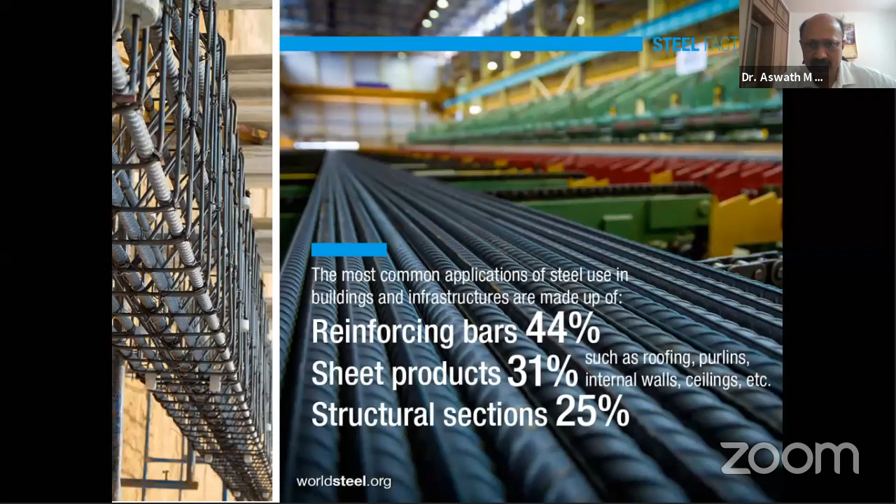We have to bother about the quality of reinforcement steel, about 44%. So why do we talk about quality? As I mentioned earlier, quality is not just necessary for reinforcement steel, but it is also necessary for other products.

Since our industry is not controlled, many products are manufactured without any quality control in place. Anybody who has got some finance can start product manufacturing in our industry, and there are no strict guidelines or eligibility criteria for giving licenses to the product manufacturers.

With this background, as users, as civil engineers, we have to be very careful about quality, and we should identify and select the manufacturer and supplier based on their background and quality consciousness. Once we start recognizing quality conscious manufacturers and suppliers, the industry will automatically transform from unorganized to organized sector, where quality will be one of the most important criteria.

As I mentioned earlier, regarding concrete products, we have been doing a lot of activities and programs, seminars, workshops and other things to sensitize people about the quality of concrete. Now we should talk more and more about reinforcement steel also in the days to come.

We have various issues in the civil engineering industry, whether it is storage of material, fabrication, or various other aspects. It may not be so bad as of now. Some time back, I took these photos from open source.

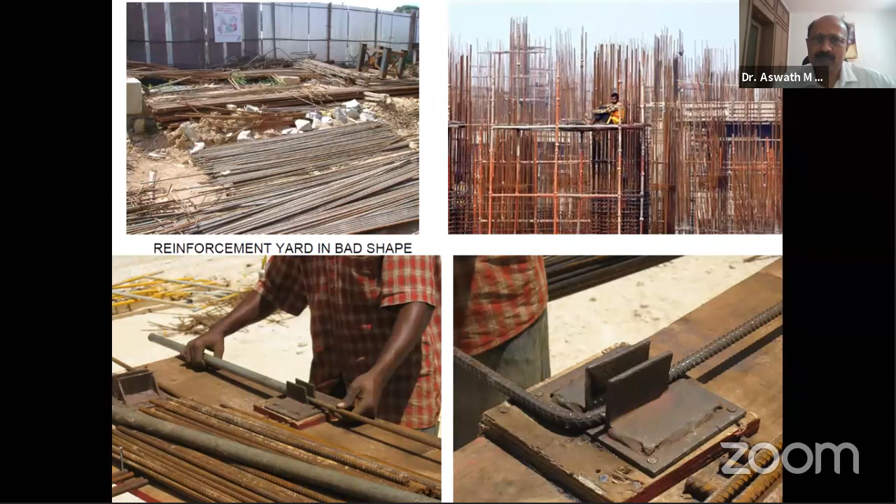You can also see some of these sites in the scenes where corrosion and other aspects are not taken care of, and demolished steel is also reused without processing. That is also another issue.

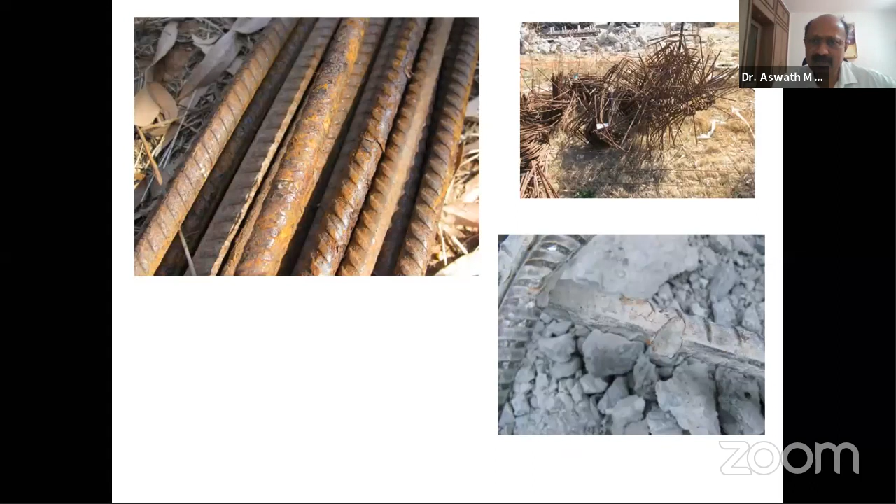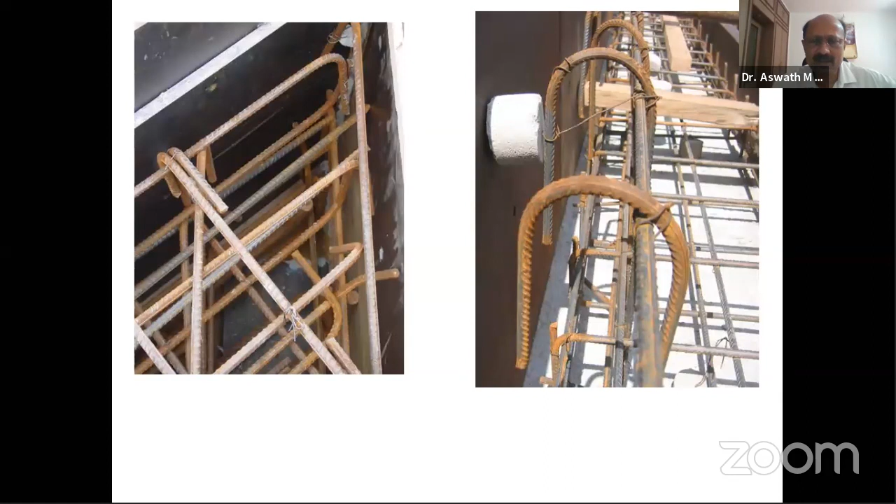Fabrication also has a lot of issues. We should know how to detail the reinforcement - detailing of reinforcement is another major area. All of us involved in analysis, design, and implementation should take care. We can have one more webinar on detailing of reinforcement also.

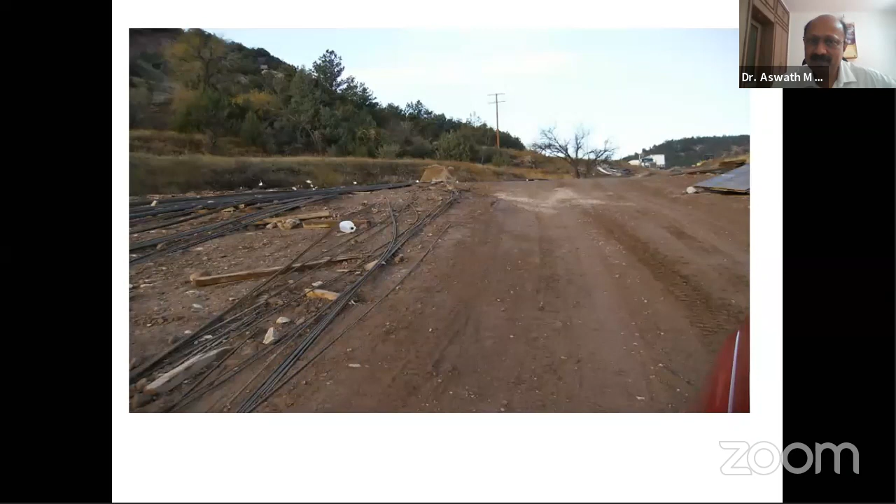Proper concreting methods are also very, very important. When you look at all these issues, we have construction quality as a whole as a major concern.

Even though many high-tech consulting firms are there, and multinationals are into the industry for major projects, maybe construction quality is taken care of there, but in medium and small industry projects, we still find some of these issues.

Definitely we should find solutions to all this, and address it from the manufacturing process - we should see whether proper infrastructure is there to manufacture from a particular manufacturer, and selection of the manufacturer and supplier should be based on the quality systems they have implemented, because that is where basic properties of the material are concerned.

Unless they have proper infrastructure and manufacturing process in place, we will not get a good product. So then understanding the properties and behavior of the material as reinforcement, we need to understand. Once we understand the properties and behavior, we become more sensitive to select a good product.

How to store and use the reinforcement - there are a lot of aspects which make a lot of difference in the overall strength of the building. Testing of reinforcement and quality checks at each level, starting from raw materials to the manufacturer till we use the reinforcement - we need to adopt proper testing methods and quality checks in place.

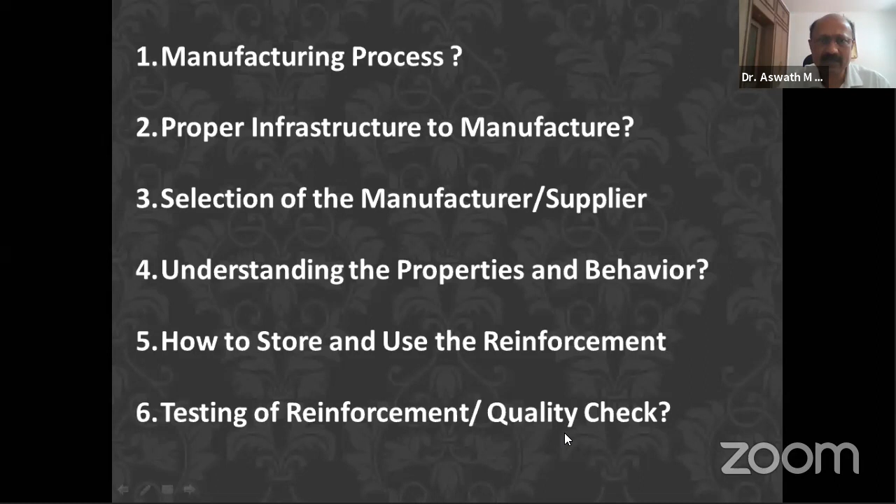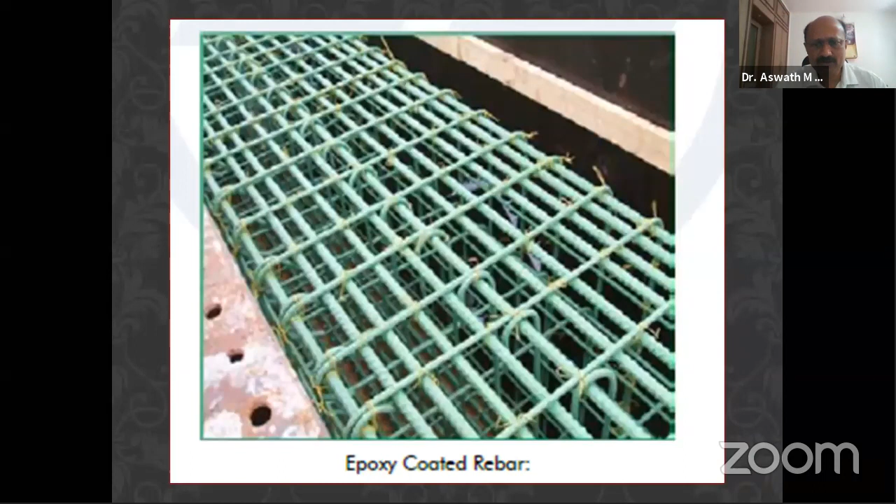We have different types of reinforcement bars - deformed bars, stainless steel bars, epoxy coated reinforcement bars, galvanized rebars, and FRP bars which are very popular these days.

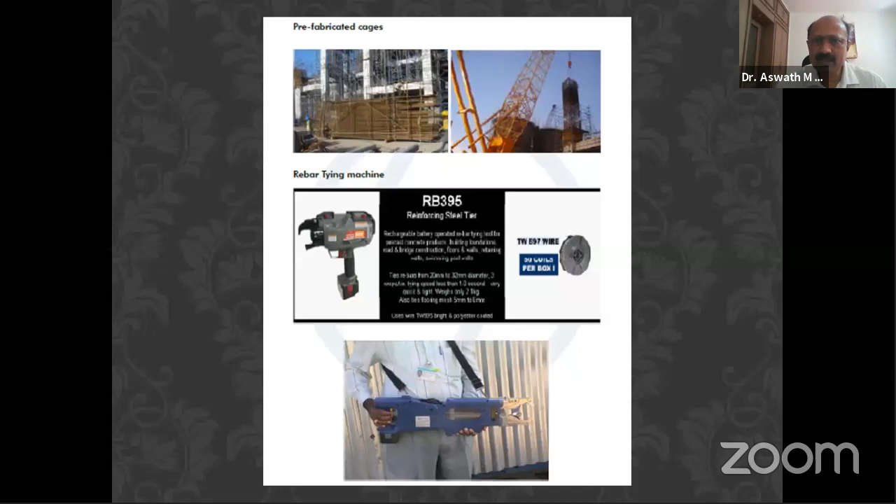A lot is talked about the equipment used for reinforcement fabrication and other things. Rebar tying machines are available - we should use all these latest methods to minimize loss and improve efficiency of use. We are having a lot of couplers in place, and we can save material if we use proper couplers.

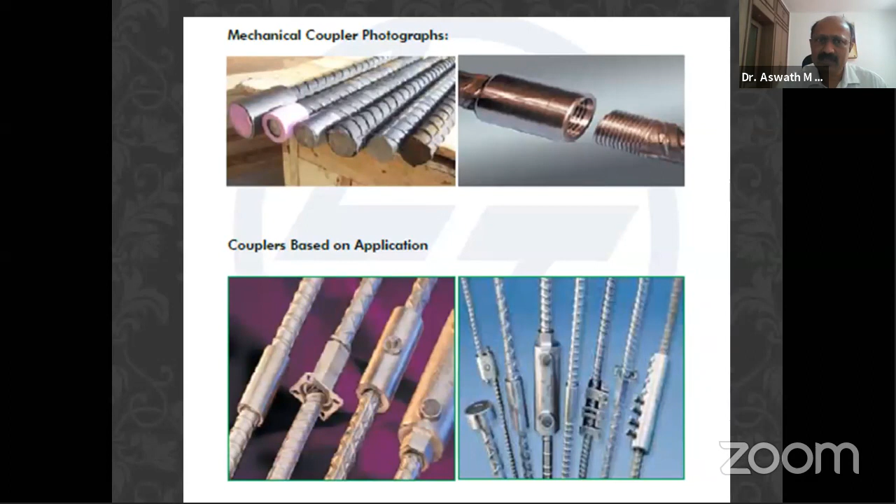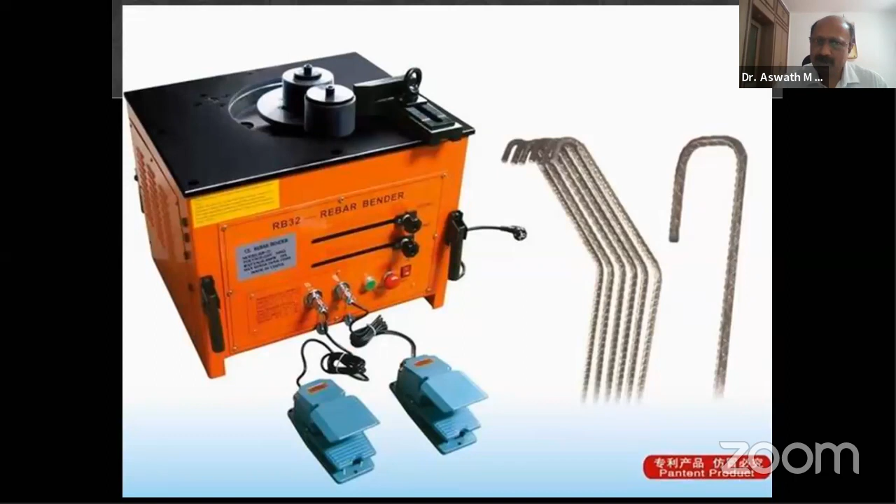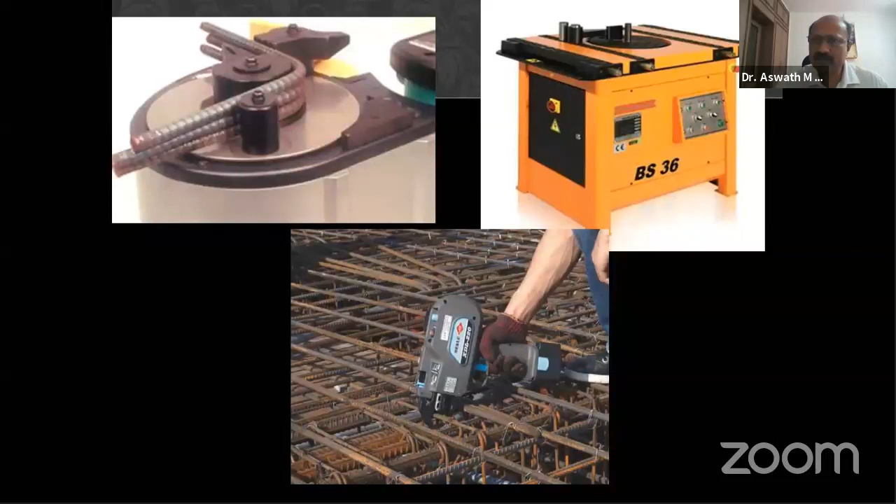We have different tests for the reinforcement. Bar bending machines are available these days, so there are a lot of solutions available to address each of these problems we face in the industry. A lot of solutions are developed by various manufacturers. We should be aware of what is available, and based on the knowledge, select the

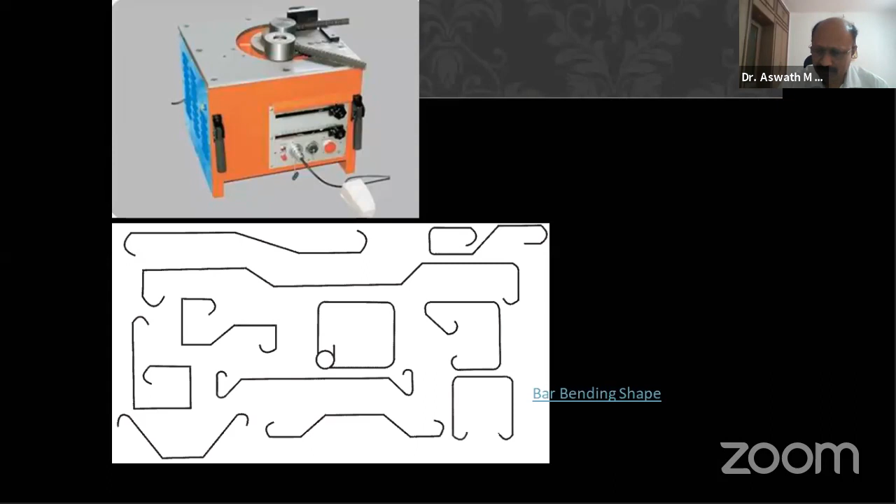best material, best product, best equipment for the reinforcement. Bar bending is a major aspect in reinforcement steel. Many times we use bar benders who are not skilled or properly trained, so we end up with a lot of problems as far as bar bending is concerned.

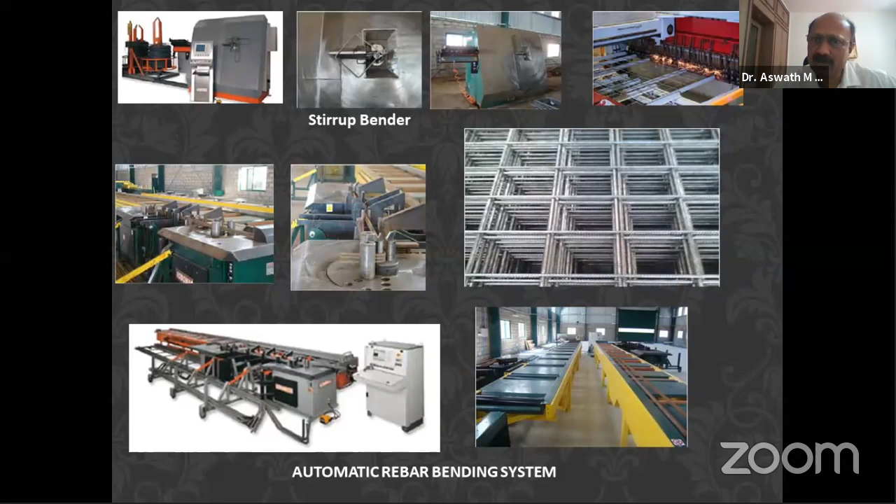The automatic rebar bending systems are also in place for bar bending issues. Now many people are coming into the industry who, if you give them the reinforcement drawing, the execution drawing, will supply the ready-made steel. You can just bring it, place it, and then start

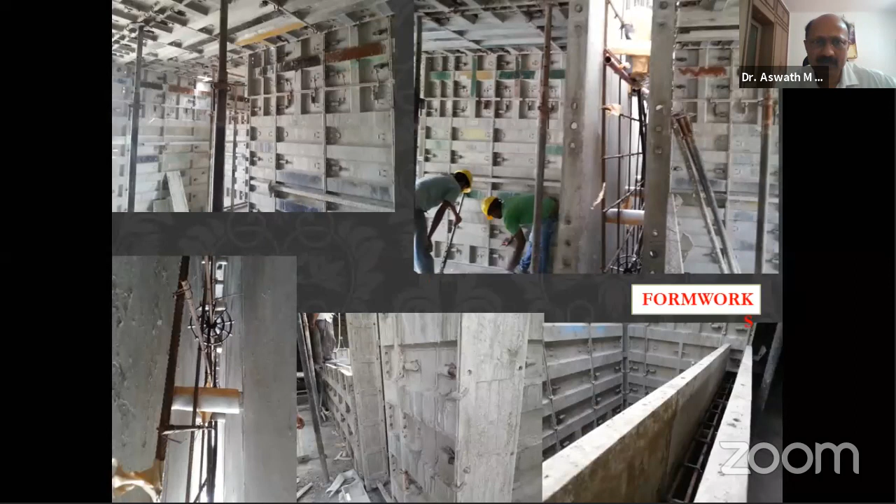concreting. So this is also getting more visible in the industry. And the accessories used in reinforcement, you have cover blocks and other chairs, as we normally call them, for taking care of these aspects. Each of these is a major area where the user should be aware of the different products available, and formwork is also another major thing responsible for the quality of the structure and use of reinforcement.

From M15 concrete, now we are talking about M200. We have already demonstrated M200 concrete in one of our concrete webinars at Indian Concrete Institute. But widely people are now using M60 and M80 grade concretes, and M120 is also used in some projects. As we use higher grade concretes, we reduce material usage.

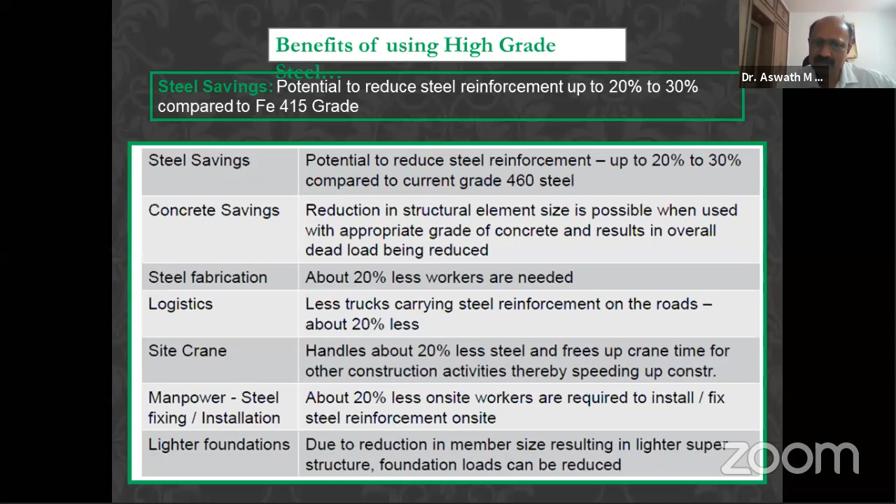Similarly, in steel, we are using Fe 415 steel. Now we are talking about Fe 600 grade steel. It is always better to select a good manufacturer and use higher grade steels, as there are a lot of benefits if you use high grade steels. We should promote more usage of high grade steels for reducing material usage.

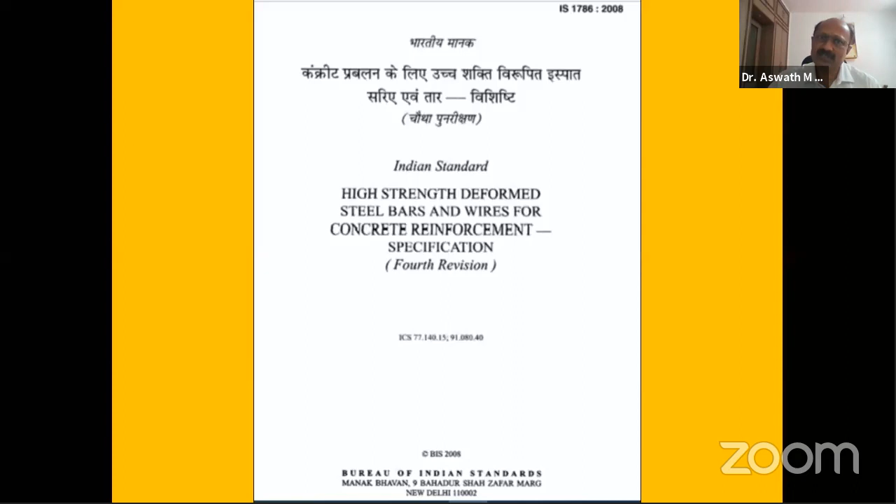For all this, our Bible is IS 1786 2008, amended in 2012. This is our major reference. When we talk about concrete, we have IS 456. When we talk about structural steel, we have IS 800. And when we talk about reinforcing bars, our Bible is IS 1786, high strength deformed bars and wires for concrete reinforcement specification.

I strongly recommend all users who use reinforcement steel should read IS 1786 completely and understand each word printed in this code. It is very, very important.

Now, in the industry, we have all these materials: Fe415, Fe415D, Fe415S, 500, 500D, 500S, 550, 550D, and Fe600. Fe 415 and 415D have very minimal use and are not available unless you demand them from the manufacturers. The majority of manufacturers produce Fe 500 and Fe 550. If you ask, they will also supply Fe 600. So these are the major grades.

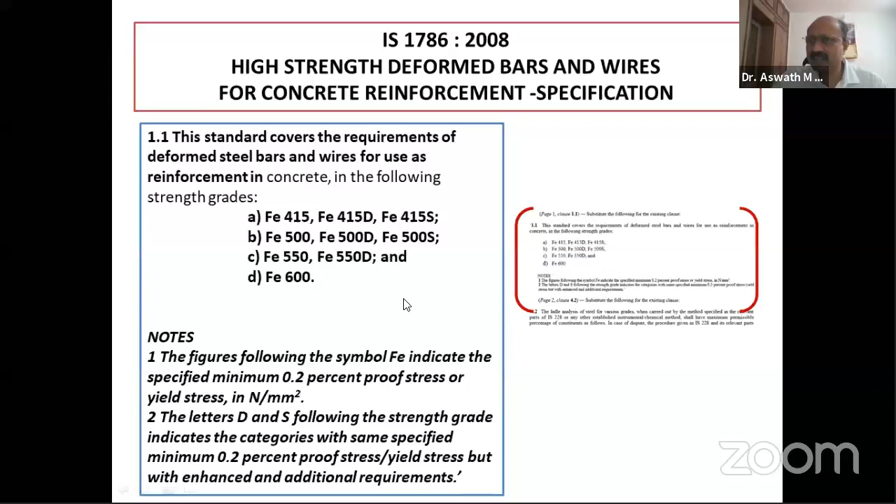I have taken an extract from IS 1786, and these are very, very important. Let us focus more on these high grade steels which are presently used in the industry, especially in the form of TMT, thermomechanically treated bars.

When it comes to the composition of steel, normally we don't give a lot of importance to the chemical analysis of the material. As site engineers or project engineers, we normally check for tensile strength of the reinforcement, and for concrete we do the cube test for checking compressive strength. But compressive strength and tensile strength are not the only two strengths responsible for the overall safety, longevity, and durability of the structure. There are many other issues also responsible for the long-term efficiency of the building.

When we talk about reinforcement steel, as per the IS 1786 amendment, these are the major ingredients responsible for the properties of the steel: carbon content, sulfur content, phosphorus content, and the combination of sulfur and phosphorus, which should be as per code 1786.

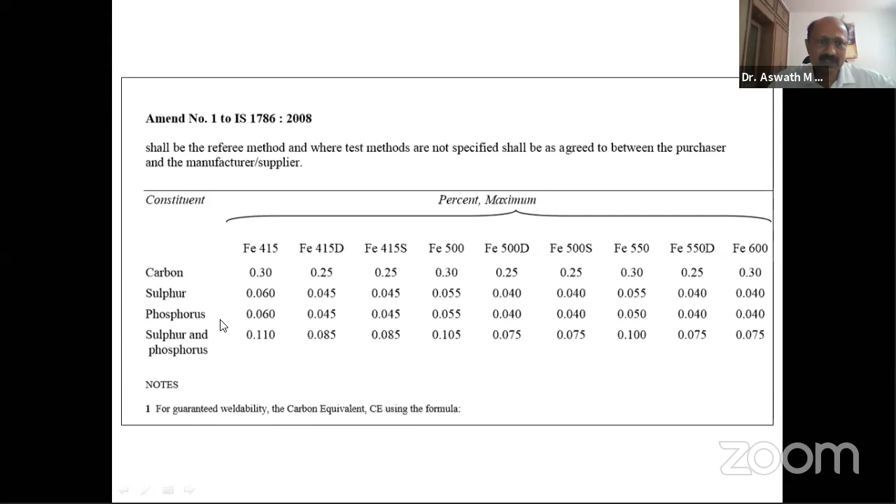For Fe 500, the carbon content is maximum up to 0.3%. Initially I mentioned the maximum usage should be about 2%, less than 2%, in various other types of steel, but for reinforcement steel, carbon content should be less than 0.3%. Sulfur should be less than 0.055%, phosphorus 0.055%, and sulfur and phosphorus together should be less than 0.105% for this particular grade of steel. For other grades, it is mentioned here. This is mainly responsible for the properties of the steel.

And nominal sizes of bars are available in the market, from 4mm to 50mm. 8mm, 10mm, 12, 16, 20, 25 are widely used. The higher diameters of 28, 32, 36, 40, 45 to 50mm are not widely used but are available in the market.

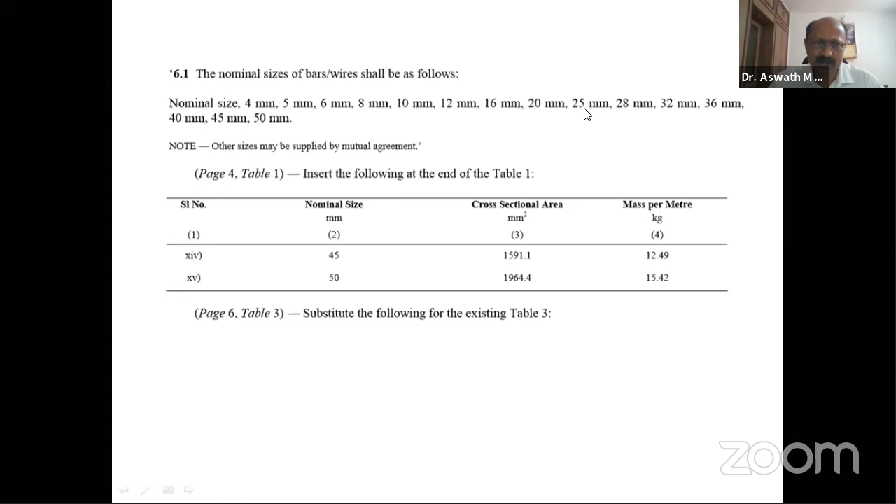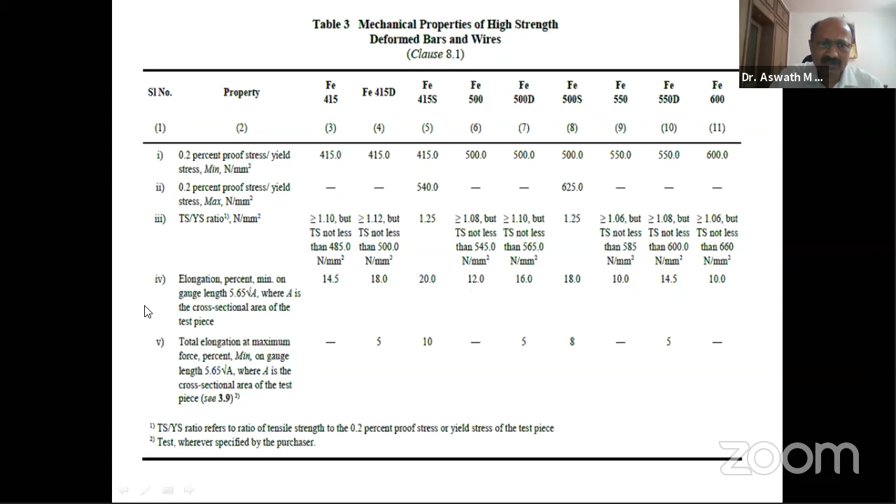For example, for Fe415D, it should be about 18%, and for Fe500, it should be about 12%. This is also very important, elongation and total elongation is given. The ratios of TS by YS should also be properly maintained. So when you test the material, these aspects should be taken care of.

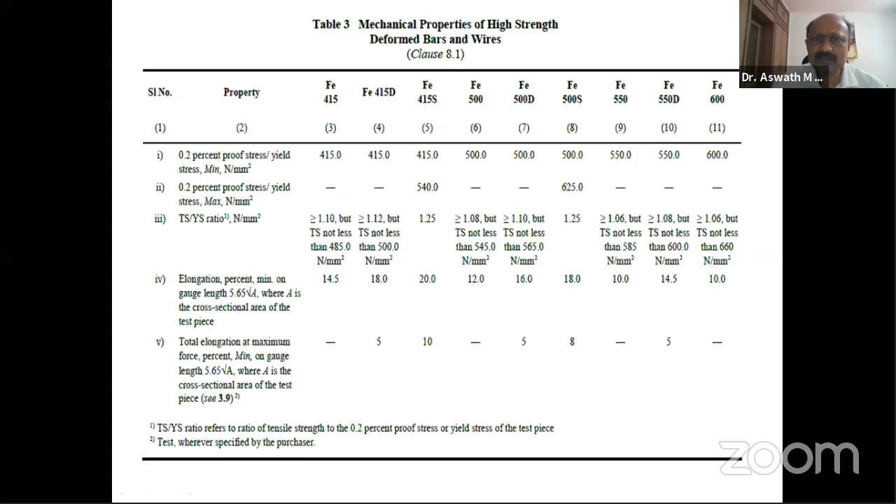The composition of the various chemicals, the chemical analysis, if you do, normally you have a lot of instruments to check the chemical composition of reinforcement bar. Spectrometers are available which give you up to 27 elements present in the steel reinforcement. Based on that analysis, if you identify these materials and their percentage, the mechanical properties of the material will also change.

Say for example carbon. Higher carbon contributes to the tensile strength. So more percentage of carbon gives more tensile strength, but you should be very careful about higher load bearing capacity and vice versa. Lower carbon content, less than 0.1%, will reduce the strength.

Higher carbon content of 0.3% and above makes the steel bar unweldable and brittle. So you cannot increase the carbon content just because you get good tensile strength, because if it is more than 0.3%, the material becomes unweldable and brittle. Therefore you have to be very careful about using the carbon content.

We are also very particular about sulfur and phosphorus. More content of sulfur and phosphorus is very bad for the reinforcement. Presence of sulfur should be limited as per IS 1786. Presence of higher sulfur makes the bar brittle during twisting, as higher sulfur content brings the hot shortness problem during rolling.

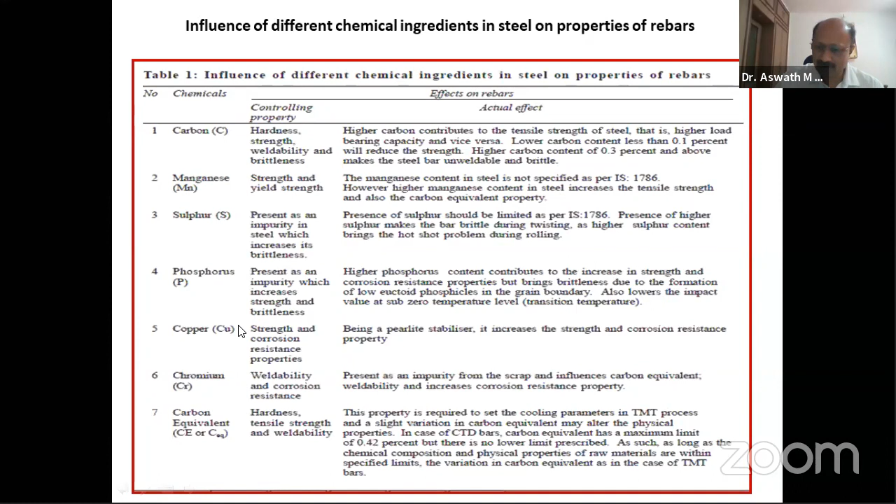So chemical analysis, in addition to tensile strength, is also very important for reinforcement steel. When you look at IS 1786, it clearly gives the tensile test. The tensile strength, percentage elongation, percentage total elongation at maximum force, and 0.2% proof stress of bars shall be determined in accordance with the requirements of IS 1608.

It should also be done as per IS 2062. The tensile strength, the method of testing is also very important, and you have to be very careful while conducting the tests. Many of us just do a tensile strength test without bothering about the procedure and method. That is also very important. So you follow the guidelines given in IS 1786 for doing strength tests and quality tests for reinforcement.

The other two important tests are bend and rebend tests. These are also very important, especially the rebend test. There are a lot of misconceptions in the industry about the way of doing the rebend test. So it is very clearly given here.

The test piece shall be bent into an included angle of 135 degrees using a mandrel of appropriate diameter. This is very important. People, when they do the rebend test, don't use proper mandrels and diameters. That is very important. If you take care of this and do the rebend test, we can assess the quality of the bar very effectively. The bent piece shall be aged by keeping it in boiling water for 30 minutes and then allowed to cool.

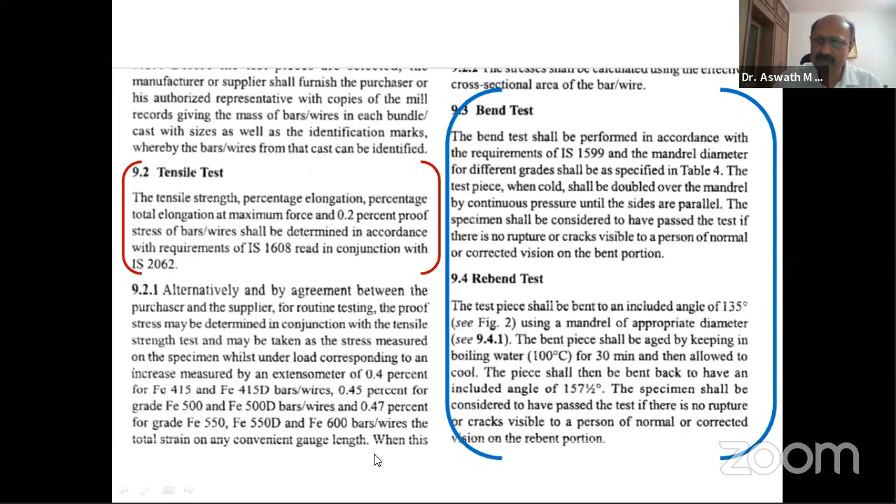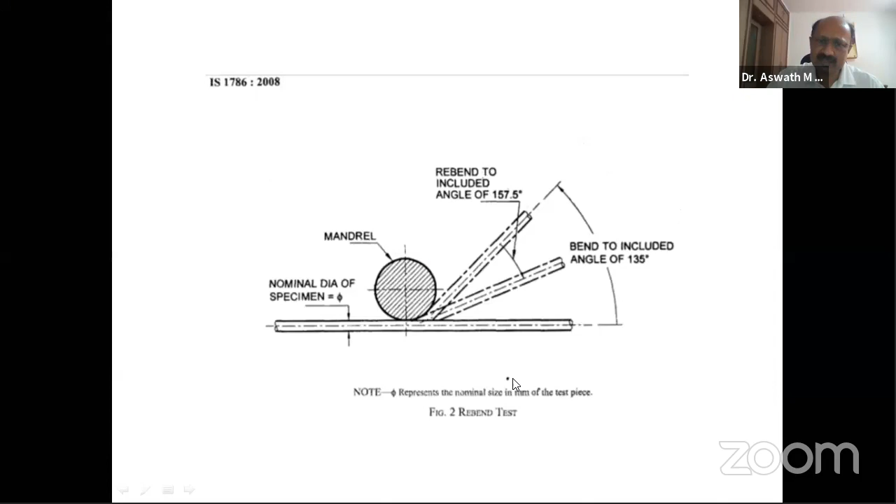I will not get into the procedural aspects of testing. Clear indications and procedures are given in IS 1786 and other relevant codes. Use that, or use the facilities available in one of the accredited laboratories as per NABL, and you will get good quality testing and properties of the material. The mandrel diameters for rebend tests are also given in the code, and this should be used for effective testing methods.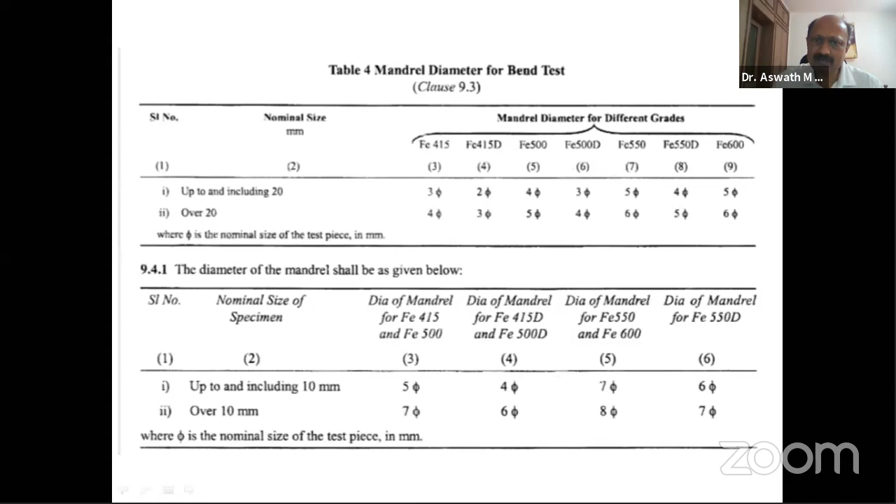So some sample specifications for reinforcement. I've talked more about IS 1786 and hope it's not been boring for you. As I said, the main codes - IS 432, IS 1786, IS 2062 - these three codes are mainly important for mild steel, high-strength steel, and structural steel.

Read these guidelines given by BIS. I'm very happy to state that the Bureau of Indian Standards, BIS, is very efficient and active these days. The BIS Civil Engineering Division is headed by Mr. Sanjay Pant, and he is taking a lot of effort in revising all the codes. Earlier, to get a code revised, we used to wait for 10-15 years. Now, every year, a lot of codes are revised as per the requirement of the construction and civil engineering industry. You can visit the BIS website, contribute to the development of the codes, and send your comments for revision. So there are a lot of opportunities available for civil engineers to get into codal formation and preparation. You can visit the BIS website for more details.

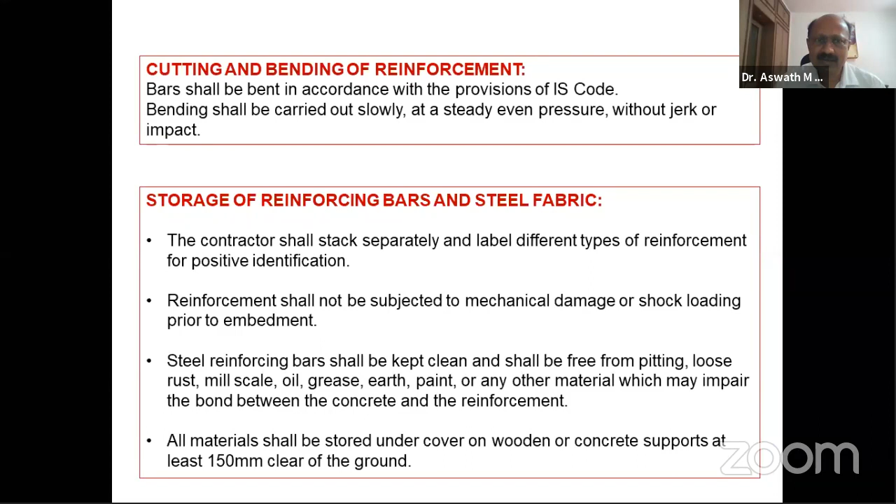As I mentioned earlier, there are a lot of accessories like spacer blocks, cover blocks, chairs and other accessories, and we should know how to use them very effectively. Cutting and bending is another major aspect - again we have a code for that and should use it effectively. Storage of reinforcement bars and steel fabric is also important; we have to use proper methods and checks to take care of reinforcement at the site. Fixing reinforcement, which is the detailing of reinforcement, is the major job, and this should be done as per the structural engineer's recommendations and the detailing code of IS.

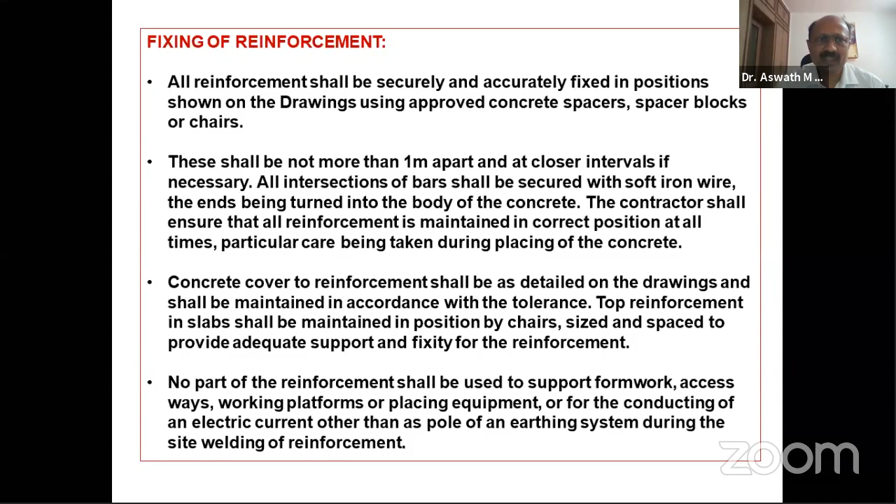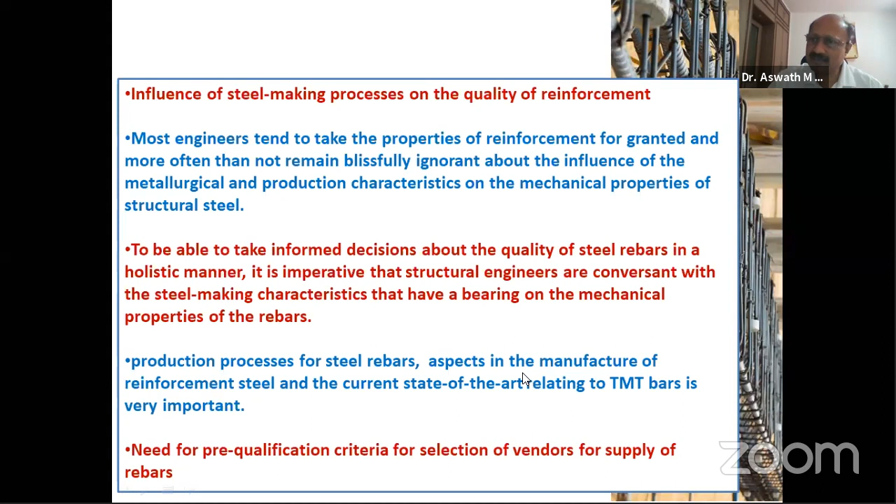Now coming back to where bar quality is affected - checking, testing, and usage of reinforcement is the responsibility of the structural consultant and project engineer. But if the material itself is not good, then we can't do anything; whatever methods we adopt to take care of quality become waste. So the influencing factor for the quality of reinforcement is the manufacturing process, the steel making process. We should give a lot of importance to the manufacturer while selecting reinforcement - this we need to stress. The characteristics of steel reinforcement are also very important for strength, ductility, and corrosion resistance - these aspects we should take care of.

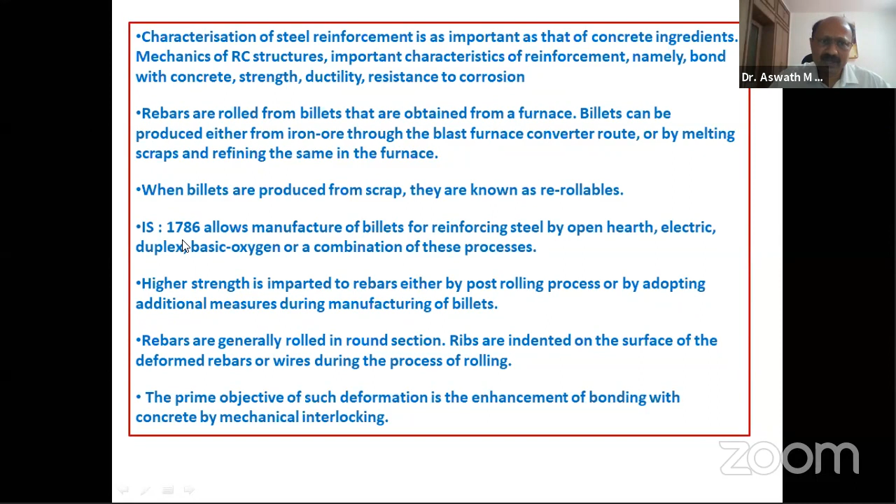IS 1786, as I said, is very important. There are different types of twisting of bars - I will not get into that.

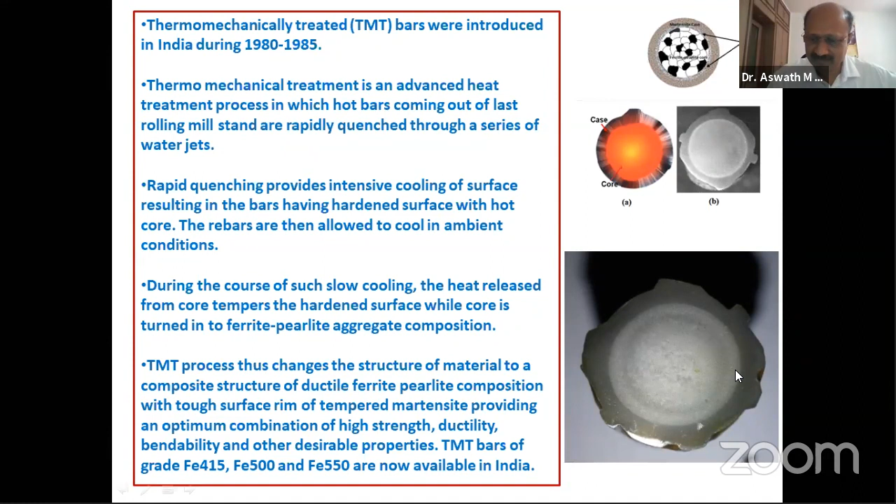So this is the process of TMT bar. It is a heat treatment while manufacturing the steel. So you can identify the bar. This is one common test everybody can do at site for identifying whether it is a good quality TMT bar or not, to identify a quenched and tempered TMT bar.

Project site engineers and all civil engineers should be able to distinguish and identify good quality bars. So ensure the mill that has supplied the rebars has a genuine quenching tempering technology.

Check whether the Q&T technology supplied to the mill is by an authorized and competent organization. Check the license. All these things we don't do, but if you identify a good manufacturer, they will take care of all these things. So what is the field test?

Field test the rebars at random. The first thing to be done is filing the surface of the rebar with the help of workers, rough hand file. A site worker will easily recognize if the surface is hard or soft. All Q&T bars have a harder surface than unquenched bars.

Finally, a random sample should be drawn. You take a sample reinforcement bar from the lot, and you finish the surface with emery paper and a small file, and then the cross section is smoothened to a fine polished state by grinder and emery paper. The smooth end of the sample is then pickled in nitrol solution, 5 to 10% nitric acid with a balance of ethyl alcohol. The result should show a uniform tempered martensite periphery with a softer core, in case of a good TMT bar.

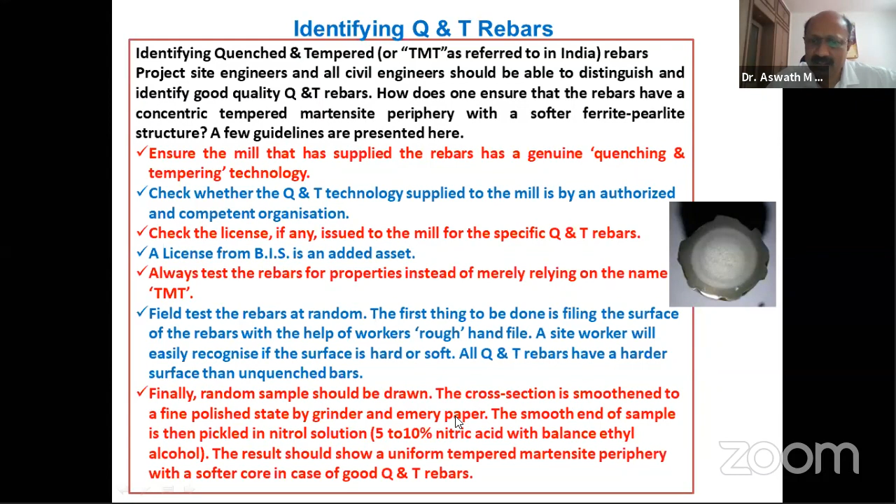So when you press this reinforcement bar's finished surface into the nitric solution, you should get a surface like this, where you can identify by naked eye the three rings of the bar. If you get that, then you can say it is a good quality TMT bar. So in the absence of other more refined tests, this can be done by any engineer with a simple test of dipping into the nitric solution at the site.

So as I said, the process of manufacturing is very, very important. I'll run through it, I think we have time. So if you're using the reinforcement continuously for your projects, it is absolutely necessary for you to make a visit to the manufacturing plant.

Like we visit the RMC plant before ordering the concrete, or we send our project engineer or quality engineer to the RMC plant, to check how the plant is managed and whether the skilled workforce is there or not. Everything depends on the automated industry we are talking about. Unless we have a trained, skilled manpower at the plant, it is very difficult to manage the process. So you need to have trained, skilled manpower for RMC production.

Similarly, you need to have trained engineers, or specifically metallurgists for the steel industry, at the plant who can process the manufacturing for the steel as per the requirements of the IS codes. So visit the plant and get convinced yourself about the manufacturing process and the quality checks they are following. If the manufacturing process is good, then automatically we get good quality reinforcement steel. So I insist all users get convinced about the quality of the manufacturing process before ordering reinforcement steel. As such, we don't have any certifying systems for the reinforcement steel industry.

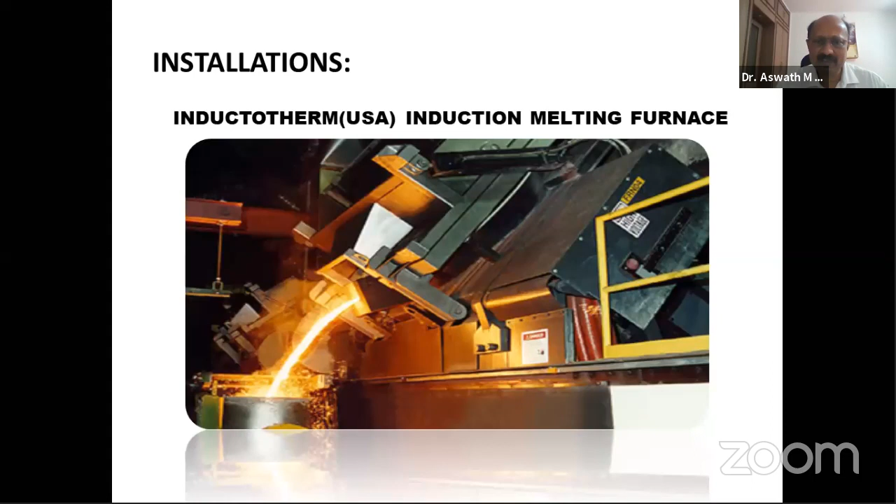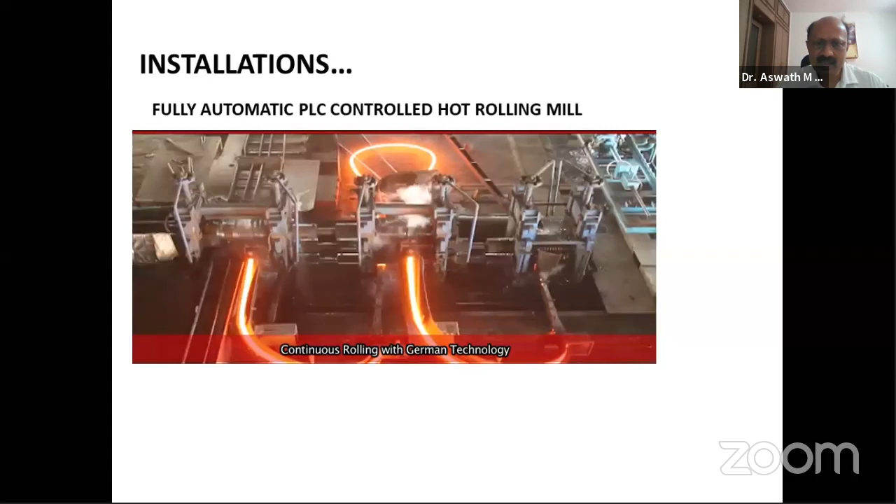We have QCI certification for RMC plants. Similarly, we need to evolve, in the days to come, some kind of certifying process for the reinforcement steel industry also. Normally they will have a continuous billet caster if they have good infrastructure for manufacturing the steel, and fully automatic controlled hot rolling systems will be there in the industry for good infrastructure for manufacturing.

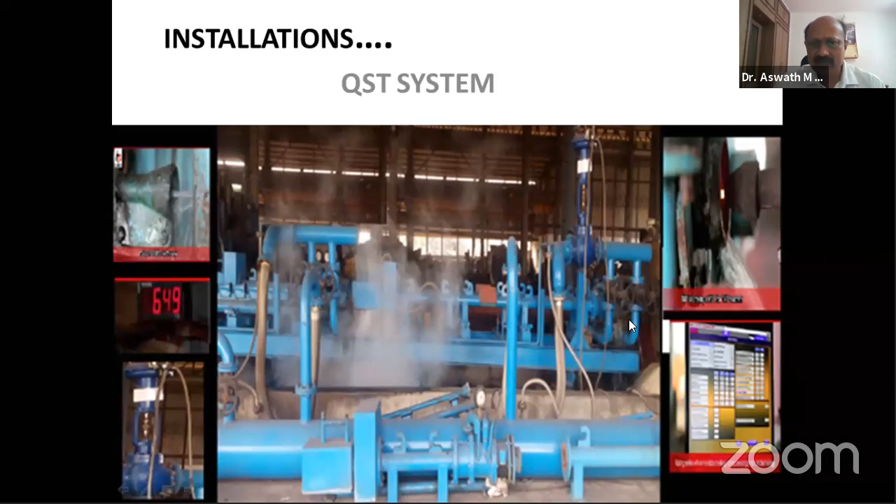Then you should have an automatic cooling bed once the bar is cut into different sizes. And during the raw material stage, as I mentioned earlier, many of the good manufacturers use a spectrometer for chemical analysis of the raw material.

Once they use raw material, before moving forward for the manufacture of steel, they should check the samples. I have taken this from one of the manufacturers' testing facilities.

The spectrometer will give about 27 chemical elements, the composition of chemical elements, and you get a computer-generated result like this, in tabular form, showing the composition of the various materials.

Compare with IS 1786, what is the maximum allowed percentage of the various chemicals, and remodel the mix - in other words, the composition of the raw material. If something is less than required, you have to add, and if it is more, you have to eliminate. That process you have to do before allowing the manufacturing process to continue.

So the spectrometer analysis is very, very important, and determines the durability of the material also. And you get a sample test like this.

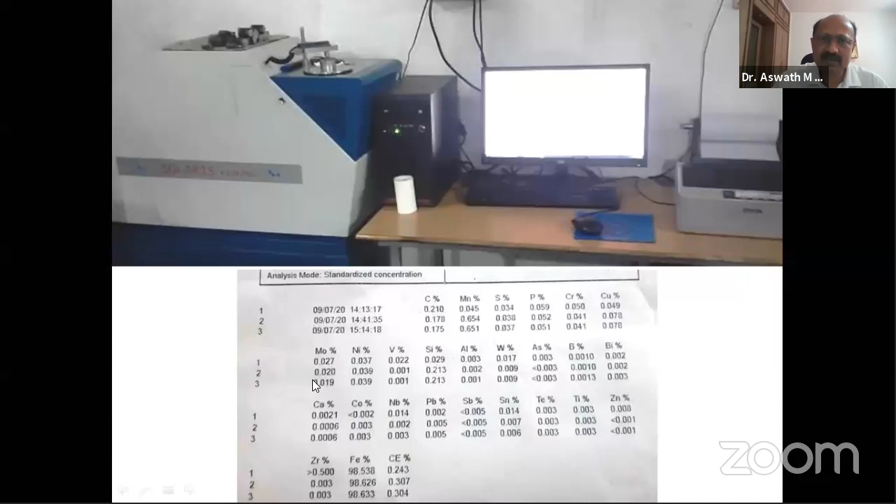This is a report generated by the spectrometer. The dates and timing are also mentioned, giving an indication for every batch of manufacturing of the billet. You do this test very systematically, getting the combination of all 27 elements. This is one of the very important facilities any manufacturer should have at their manufacturing plant.

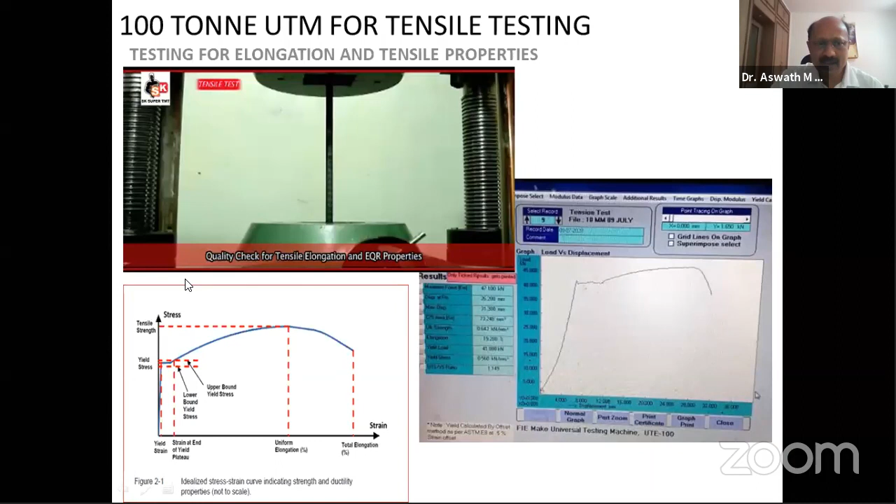After manufacturing, you have to test the bars as per the sampling requirements in the factory itself, and see whether you get good performance of the material as per the standard requirement at the site itself. So this is sample collection and testing at the site during the charging process.

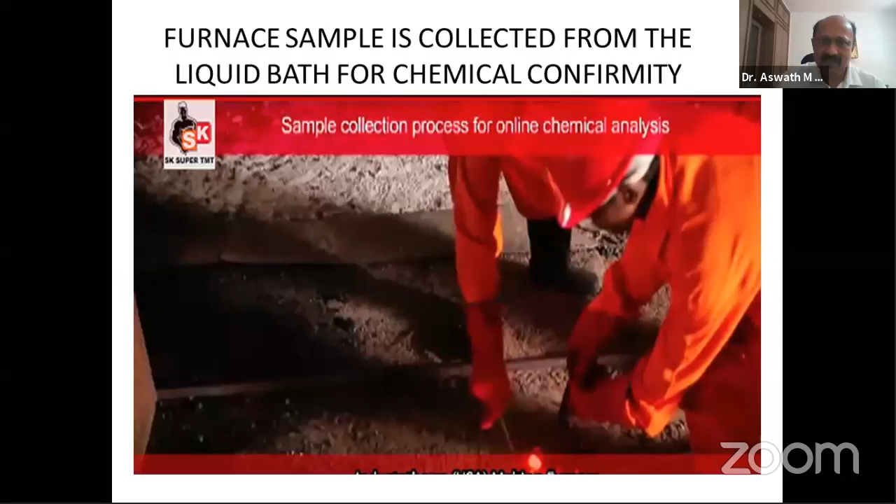These images are just showing you for the purpose of understanding what the manufacturing process is, how important it is, and other things. So this is the quenching of bars - how the hot bar gets into the quenching system and comes out after cooling.

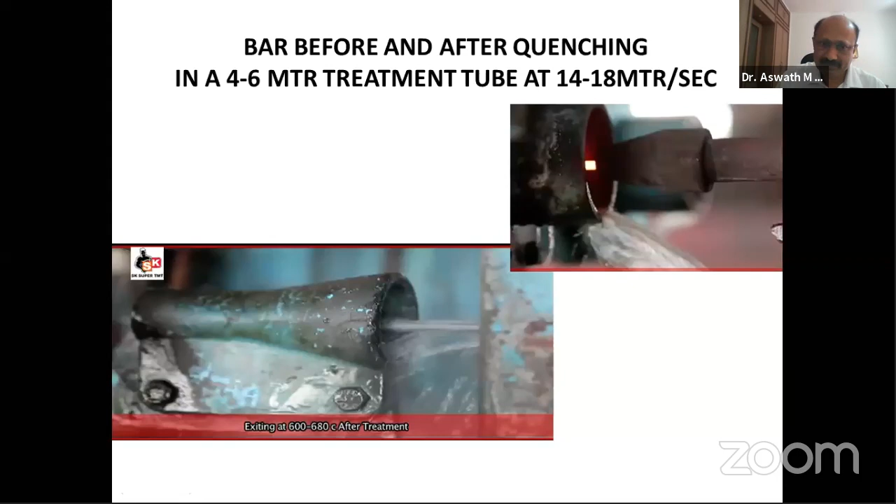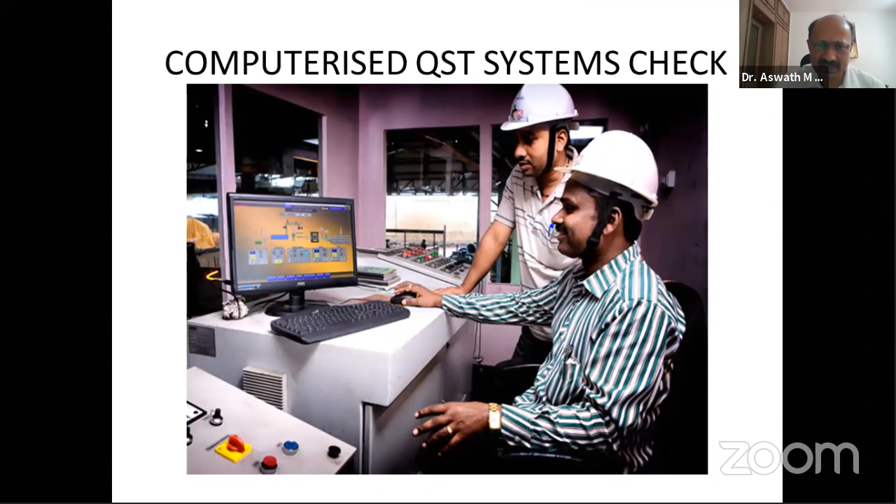Outlet bar temperature control panel. Almost all good manufacturers will have automated computerized QST systems these days, and it will ensure good quality manufacturing and also ensure the grade. The allowance is about plus or minus 20 degrees.

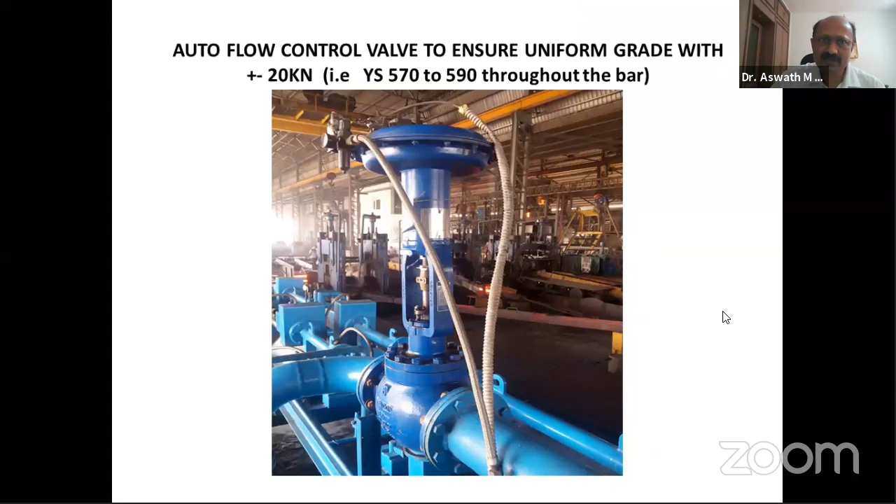And you will have automatic bending and cutting machines at the place.

So the next few minutes... Rahul, I think I have some more time.

Okay, the defects in rolled steel inspection on testing. Some checklists I have given here at the end, before concluding. I think it's very, very important for all of you to take care of this.

In order to produce satisfactory rebar products, it is important that an adequate quality control system be established and maintained. This system should include mechanical and metallurgical testing as required, and the inspection of surface and other defects.

Metallurgical testing - the complete process is metallurgy-driven, and a metallurgist is very important to be stationed in the manufacturing plant to control the chemical composition of the reinforcement.

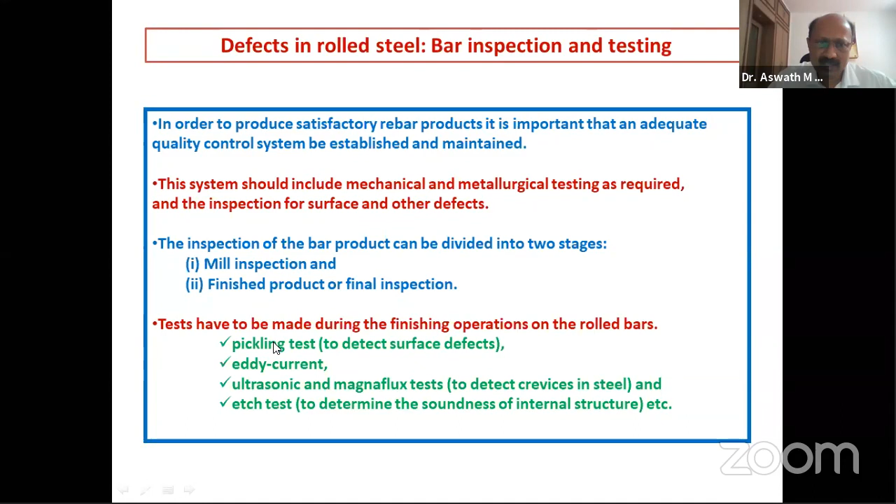The inspection of the steel bar product can be divided into two stages: mill inspection and finished product or final inspection. Tests have to be made during the finishing operation on the rolled bars - pickling test, eddy current test, ultrasonic and magnaflux test, and etch test.

So, manufacturer record and delivery documentation - you have to insist on this as per IS 1786 and other relevant codes. The manufacturer should give some basic information to the user along with the supply.

The manufacturer shall establish and maintain the required records and shall identify the steel reinforcing bars and their delivery documentation accordingly. With each delivery, the manufacturer shall supply the following information. It is mandatory - you can demand all this information from any supplier. It is not just bring and dump on the site and go.

Manufacturer's name and place of production, nominal diameter and grade, the heat cast number and cast analysis including all specified elements and elements used for the calculation of the carbon equivalent value, the results of the tensile test and rebend test, the mass per meter (weight of the reinforcement bar), and the results of surface geometry measurement or bend test.

The manufacturing process route - which method, as we discussed in the beginning, there are two routes of manufacturing, which method they have followed. For ribbed steel reinforcing bar, the rolled-on identification mark on the bar - they have to print the IS number and the brand mark should be there.

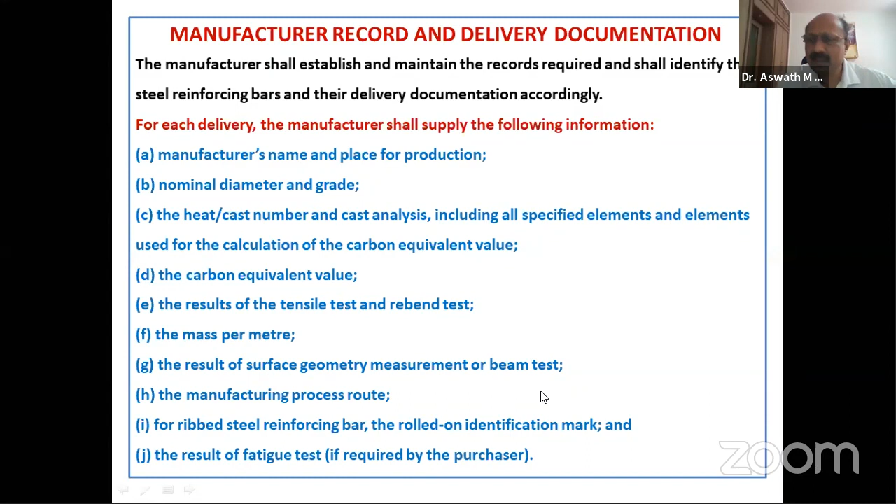And result of a fatigue test if required by the purchaser - this is optional. All other information should be supplied along with your delivery list, along with the bill, in other words.

Checklist for initial scrutiny of drawings and schedules - this is also very, very important. We may talk about so many things.

The manufacturing method should be like that, everything. But finally, before implementing the reinforcement, before using the reinforcement, if you take care of all these issues, then automatically we can avoid a lot of unwanted items and focus on the quality.

Can the reinforcement as detailed be fixed? Does the detailing permit sensible location of construction joints? Sometimes it is also very important. The site engineer and project engineer, especially the civil engineer responsible for fabrication of the steel at site, should also have knowledge of all these things and detailing.

Exposure is important because most of the times you cannot blindly assume that drawing coming from a consultant can be directly implemented. You should glance at the drawing and identify whether it is okay or not. Sometimes in a hurry, due to a demand because there is a lot of pressure at site for the drawings, some junior might have released the drawing without the scrutiny of the higher ups. So you cannot simply implement the drawing as it comes from the consultant.

I'm not blaming the consulting offices, but it is also very important. As civil engineers, we should glance through, and if anything which is abnormally visible in the drawing should be brought to the notice of the consultant and get it rectified before using, because once you cast the reinforcement concrete, it is very difficult to undo the process.

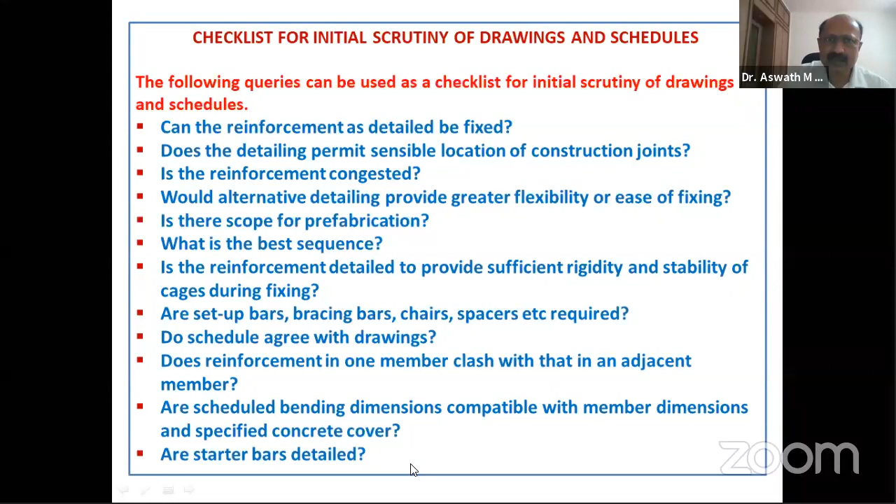For the delivery checklist: ensure adequate offloading space, check weights given on the delivery ticket, ensure correct handling during unloading, check reinforcement is of correct type, bundles are correctly labeled, and check reinforcement is of correct grade.

This is very, very important. Normally they supply the steel, you use it. You might have ordered Fe 500 or 500D or 500S. Check whether you're getting the same steel to the site. Before issuing to site fabrication, you should check all this.

Check the bar sizes. This is also very, very important. Many times, small variation in the bar diameters, if not properly checked, instead of using 16mm, you might end up using 12mm or 20mm. This kind of mistake also happens on a bigger site, so the project engineer should be very careful about all these things.

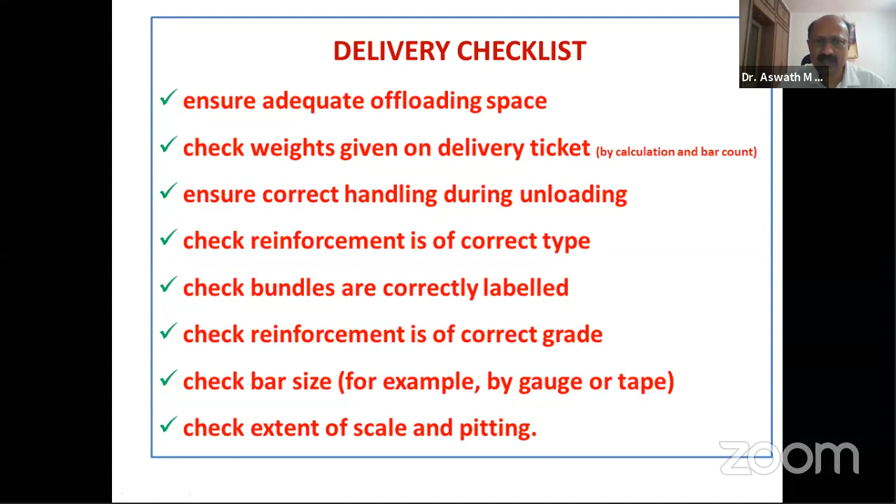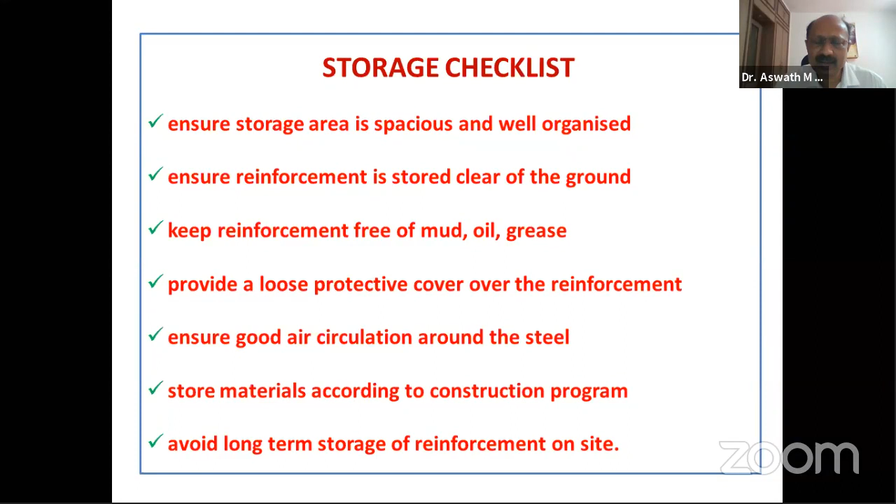And you should also look at the scale and pitting of the bars, whether they are good textured bars. Similarly, you have a storage checklist, which I will run through quickly. You should store the steel as per the guidelines of the codal provisions. There's also a bending checklist, which I'll run through.

For the pre-concreting checklist, you have a lot of checkpoints. We will take up some questions and then come back if necessary. You can go through it, it is easy to understand.

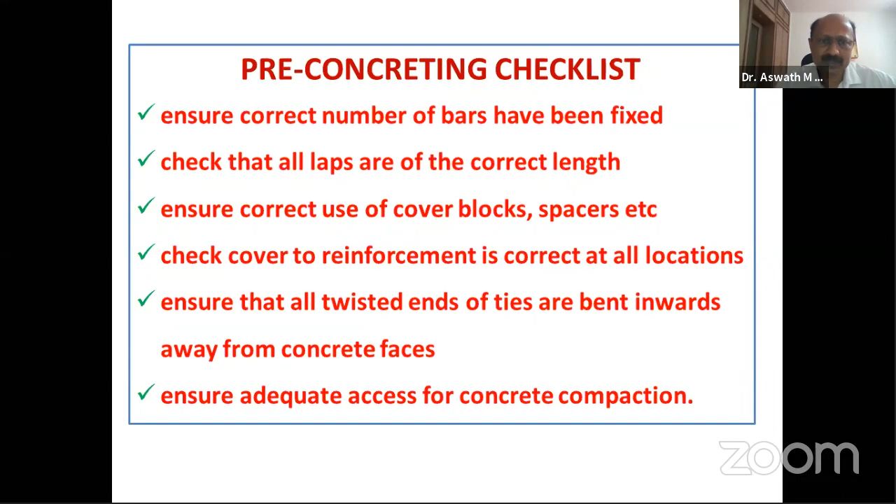Site actions influence cost. Definitely, if you properly manage the steel selection and usage, all the methods, you can also save a lot of material. And finally, cost is very, very important for all projects. You can minimize the cost of the project by taking care of proper quality measures, not only for reinforcement but for all the materials used at the site.

Many times these days we see a lot of scope for retrofitting and rehabilitation. It is becoming a huge industry now. Just after 5 or 6 years, buildings are subjected to repairs and retrofitting. This is because we don't take proper adequate quality measures during the selection of raw materials and construction materials before using them. So if you focus more here, the maintenance issues will be very minimal.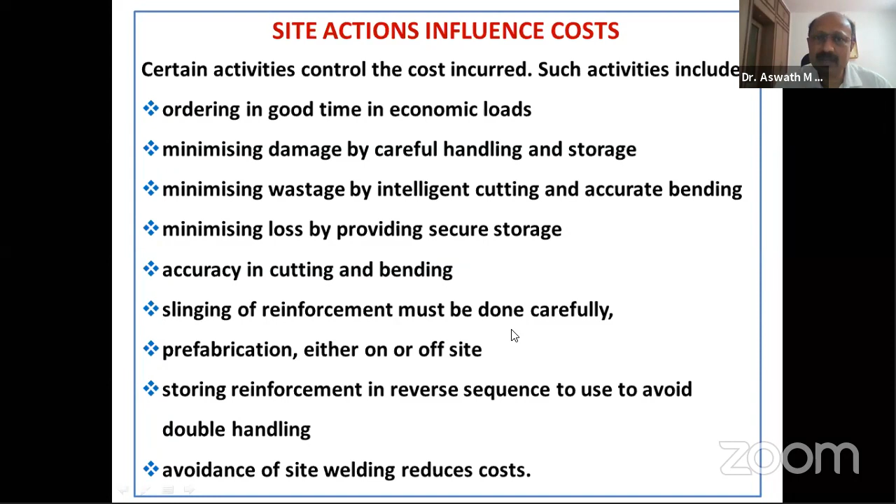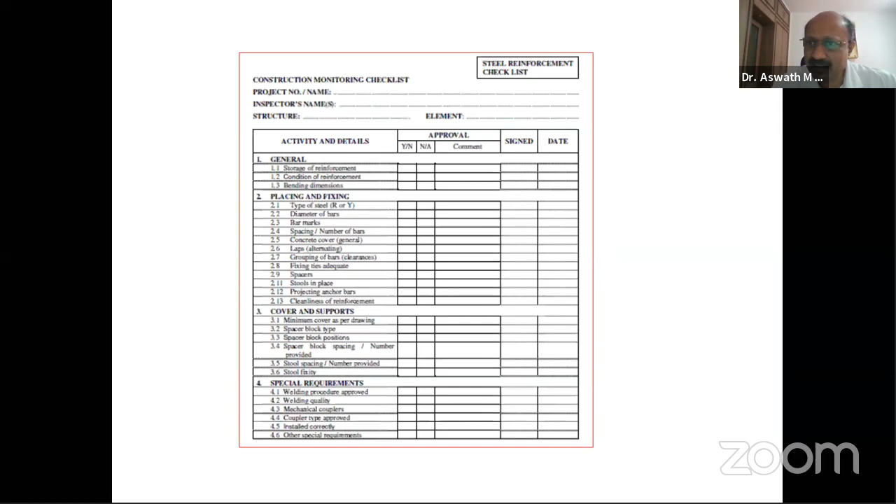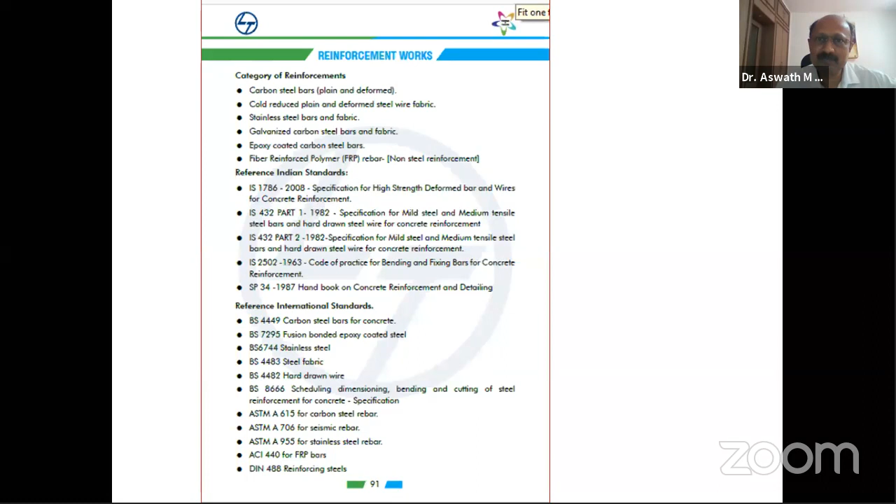You also have steel reinforcement checklists available. It is available in most consultants' offices. You can have a detailed checklist. I have taken this from, I think, an L&T project. So reinforcement was categorized, and all these things are given with due acknowledgement to all the people from whom these references were taken, only for knowledge purposes.

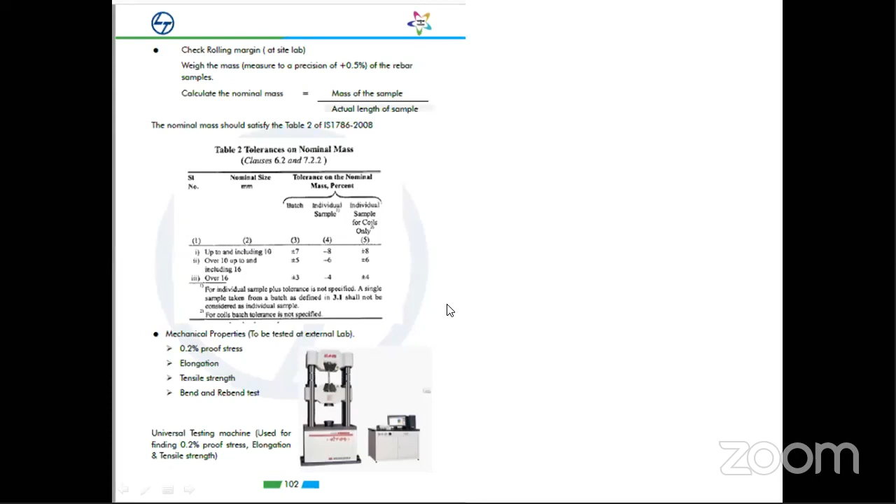ICI and some manufacturers have come out with some guidelines for student education. Some of these charts show the various IS codes available. About 39 to 40 IS sectional divisions are there. You can work in any of these and assist the Bureau of Indian Standards in revising the codal provisions. The most important reinforcement steel related codes I have listed here.

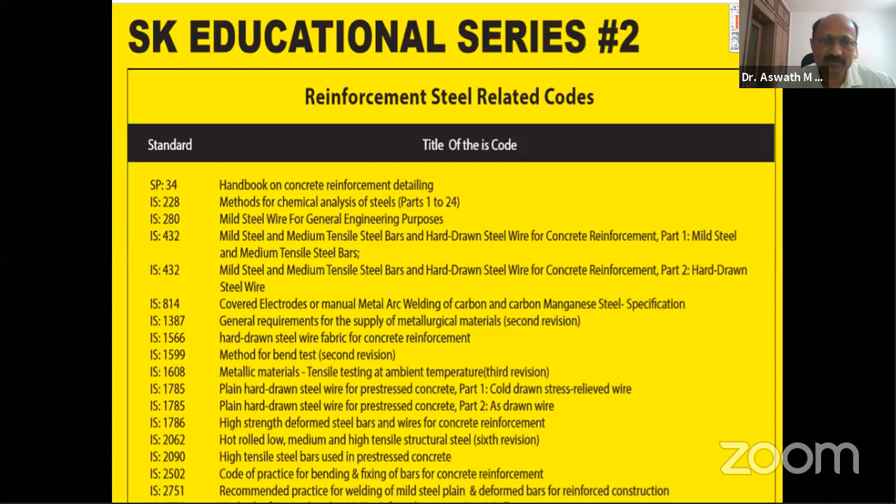You can go through these codes to understand and effectively use the reinforcement. As a civil engineer, it is mandatory to go through all these code books, which is very essential. When you have sound knowledge of a material or product, you have authority in deciding and using it. So as civil engineers, to be popular and efficient in the field for the long run, we need to go through all these codes and stay conversant with codal provisions and revisions as and when BIS releases them.

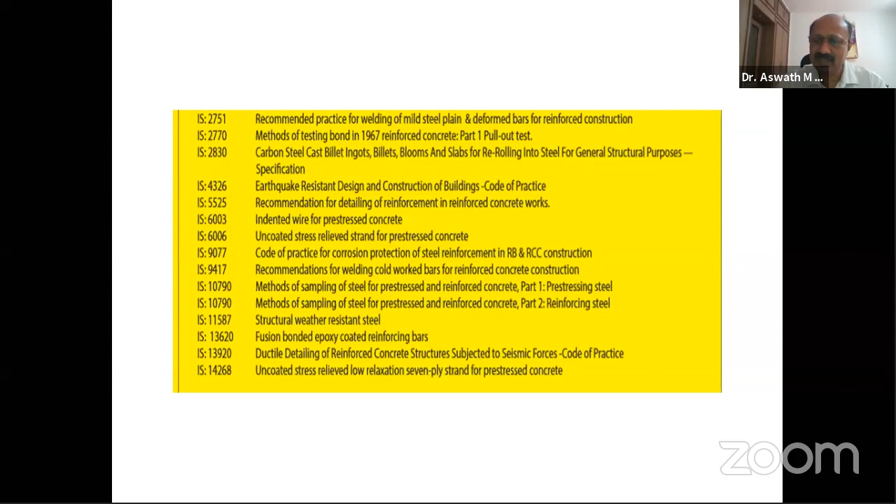I've used some references, which you can also go through. The ICJ journal carried an article by S.A. Reddi and others about certification and validation aspects, some of which I've taken into this presentation. You can also look at the World Steel Organization, IBEF, and newsletters released from various stakeholders, as well as manufacturers' websites to understand the quality systems they adopt for manufacturing.

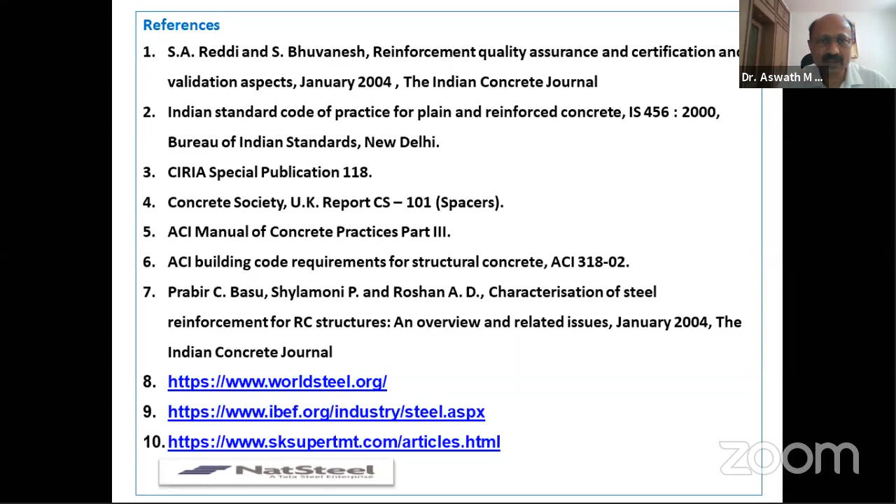I'm also involved in preparing a reference manual for field engineers on building construction. This was released by the Task Force for Quality Assurance in Public Constructions, Government of Karnataka. This book is freely available to download at the KPWD, Karnataka Public Works Department, website.

This handbook is prepared under the guidance of late Dr. C.S. Vishwanatha as chairman of the task force. When he was chairman, I was fortunate enough to be involved in preparing this manual as editor-in-chief, under the guidance of engineer L. Ravindranath as member secretary. The who's who of the construction industry, the top consultants, are all involved in preparing this document.

This document is a very good reference for all of you to go through, and you can download it very easily. So thank you very much. I think I've completed, we've taken 10 minutes extra. I have not spent a lot of time on each aspect, and I have not gone into the technical details of each one.

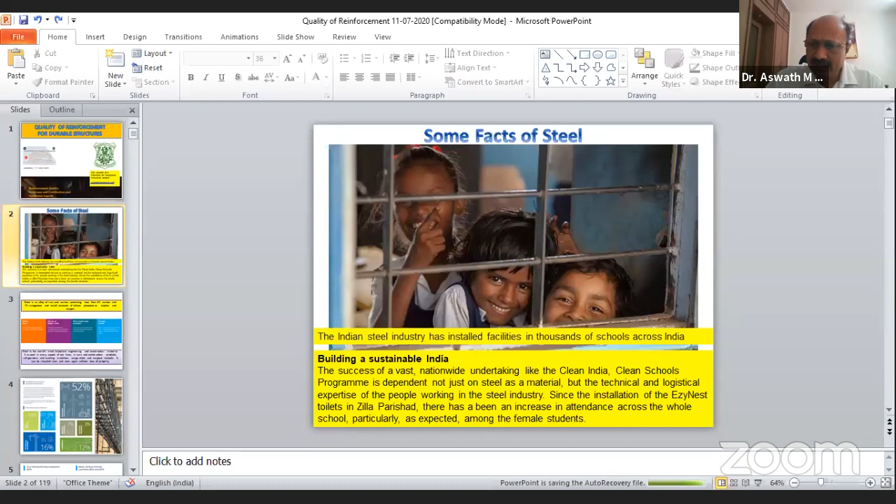This question is very simple. Many people think it is a very complex experiment, but it's a very simple test. They have a system of procedure to make the sample, and automatically you get about 27 chemical components. I've shown you this test sample - it is a very simple test. Every manufacturer should have this, and if they don't have it, you can insist they buy one and do the test.

Manufacturers generally will give that MTC, but the problem with third party test - is there any rules and regulations to get it compulsorily done? Sir, it is mandatory for all the batches. So you can ask whenever you are getting a huge quantity of reinforcement steel - if they change the batch of raw materials, then for every batch you can insist on this test. And randomly you can take samples and get it done by third party laboratories. So this is the test - a simple billet sample, and you get the complete analysis.

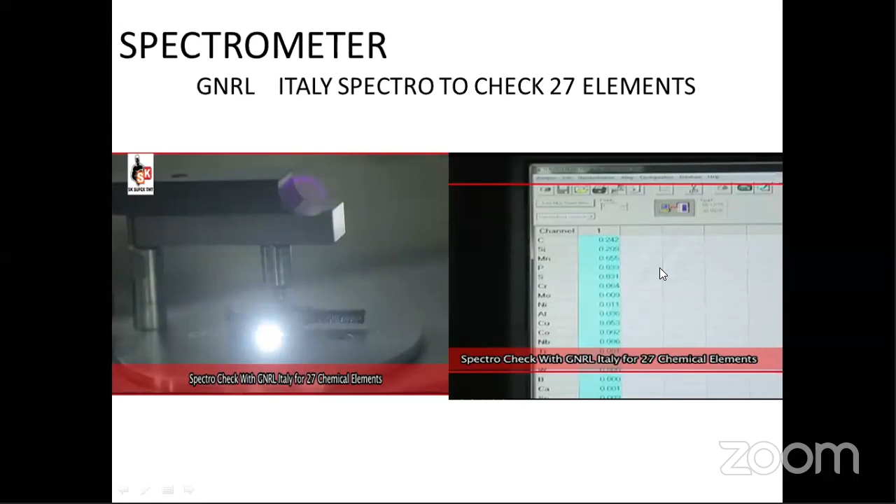Yes, sir. Any other question? Sir, one more thing.

Regarding fiber instead of steel, which is majorly used - as you said, 56% of steel is used in the construction industry - so introducing fibers into it, like PVC solid bars for minor structures, any input on that, sir?

Fiber reinforced concrete is developing very fast. In fact, some consultants like Mr. Basuraj of Chetana Consultants - his dream is to not use reinforcement steel at all in concreting, to reduce it to a minimum stage and use only fiber reinforced concrete. As of now we are not at that stage, but adding fibers will definitely increase the tensile strength properties. I'm in touch with Basuraj, sir. As a replacement of reinforcement steel, we are not at that stage as of now.

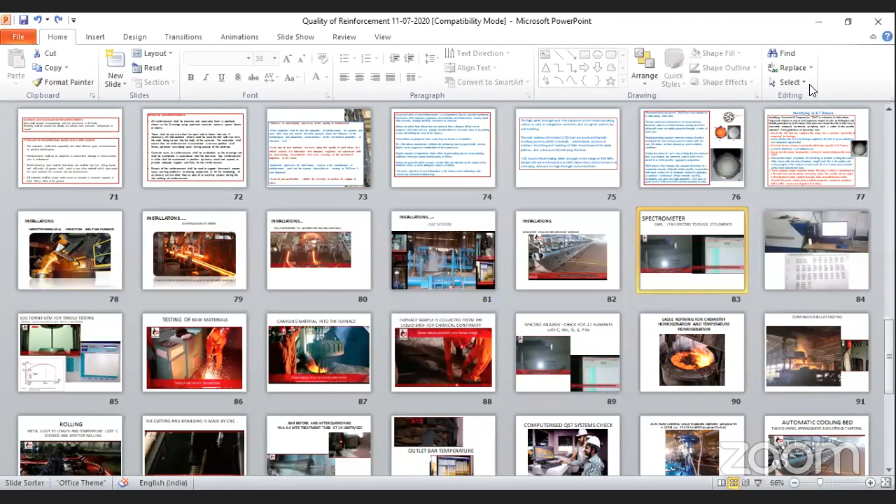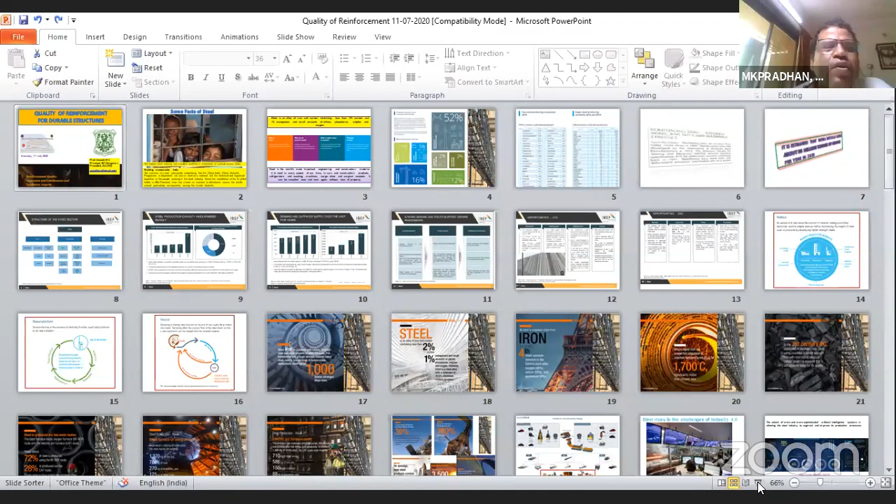What is the sampling rate for the tensile test, bend test, and all this at site? Suppose I'm getting 50-ton steel, 100-ton steel, or 200-ton steel at a lot, is there any specific guideline for the sampling rate?

Sampling, I think, is given in IS 1786. I don't exactly remember, but I recall that for every batch there should be a test — a batch of manufactured steel. If you're getting it from the same source, it's for every batch manufactured.

For every 30 tons, we do one sampling, sir. Okay, maybe — that's why I'm asking, whether that is related to the batch, or if any specific tonnage is mentioned there. That is not something I recall exactly — please check the code, you will get the exact sampling rate.

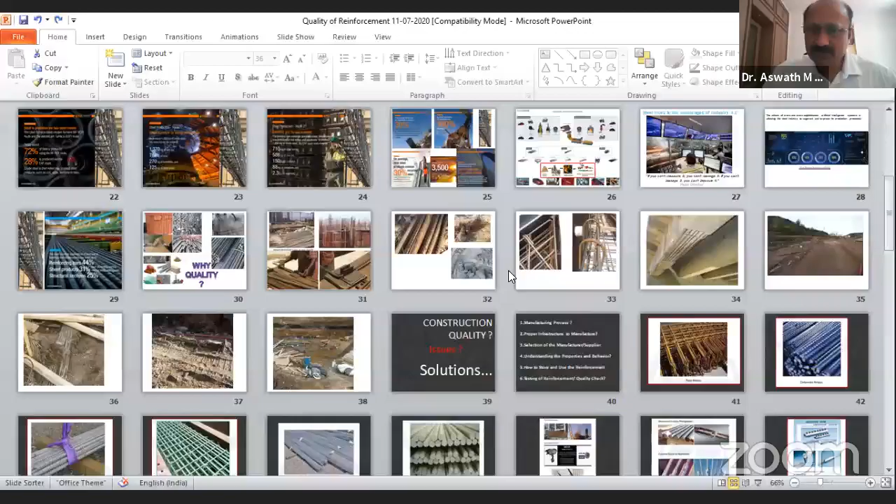But rather than welding, now couplers are available. I've shown some slides on the couplers. It's easy to do, use the couplers instead of welding. This is more effective and faster, for lapping and splices.

My question is for the replacement of the starter. If we want to replace the starter and use a tie member and weld with stirrups on our main reinforcement, then what happens at the vertical reinforcement, and what are the pros and cons of this welding effect?

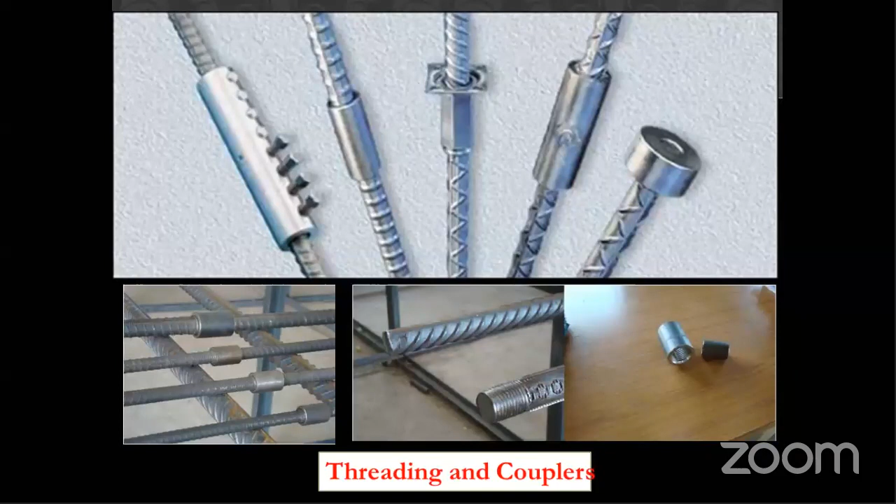Okay, for the starters, I'm not very clear what exactly your requirement is. So please mail your question to my email address. I will consult some other experts and come back to you.